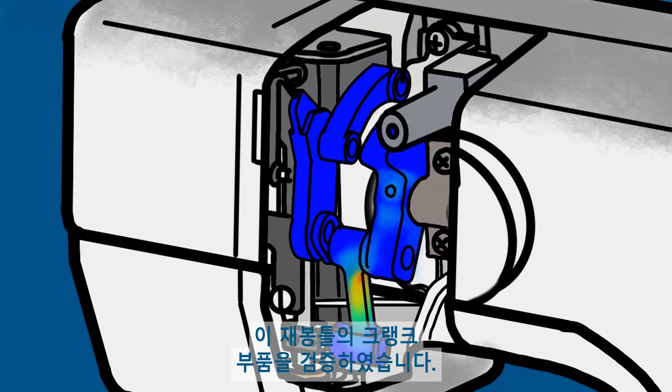Connecting SOLIDWORKS to advanced simulations just got a lot easier with 3D Experience Works. Adam has an existing simulation study to validate the crank components of this sewing machine. While a linear static analysis in SOLIDWORKS simulation provides good insight into the structural integrity, Adam needs more capabilities provided by the 3D Experience platform to solve for the dynamic response from the inevitable needle break.

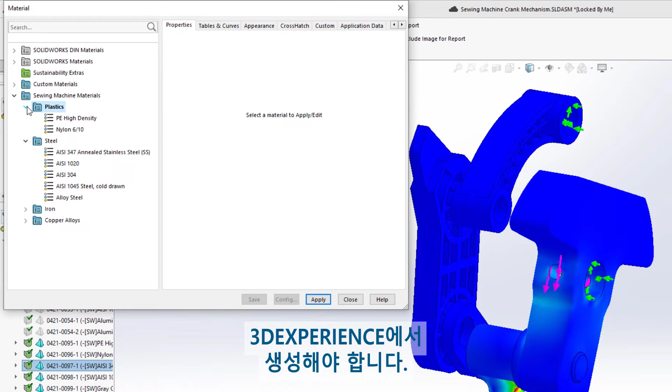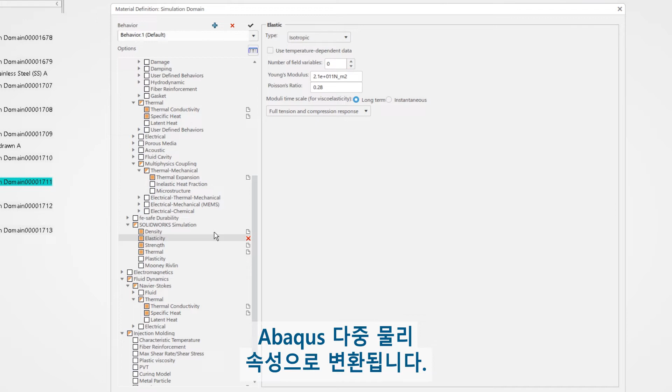Some of the sewing machine components are defined with custom materials, and they need to be created in 3D Experience. To automate this task, Adam imports his custom SOLIDWORKS material library. This eliminates the need for the time-consuming and error-prone task of creating materials manually. In these new material objects, the SOLIDWORKS simulation material properties are maintained and converted to Abaqus multiphysics properties. These are leveraged to solve for additional real-world phenomena. For the case of the needle break, Adam only needs to add damage properties.

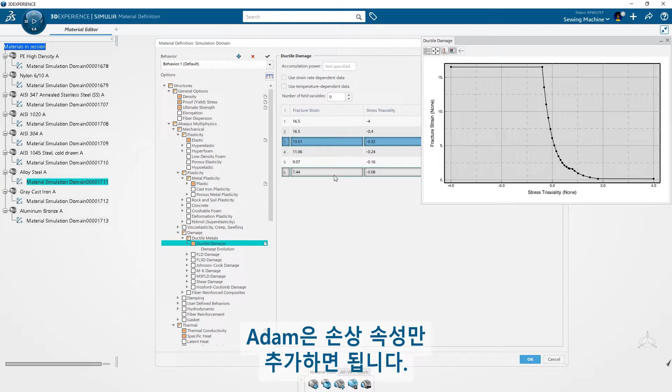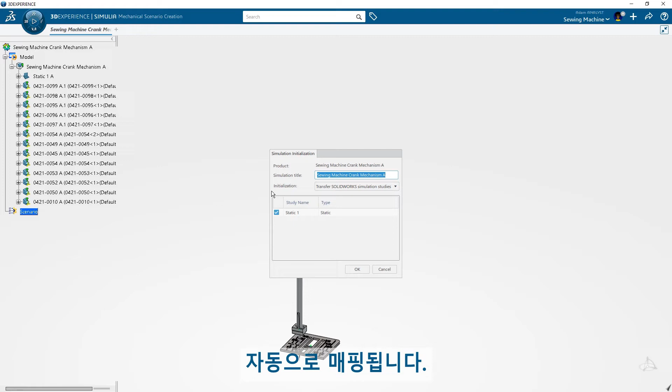Back in SOLIDWORKS, Adam has access to the centralized 3D Experience material library, so he can ensure he's defining the correct materials. Additionally, when he transfers the simulation study to the platform, the materials, along with the loads and boundary conditions, are automatically mapped to the newly created structural simulation. With this, Adam can easily extend his simulation workflow.

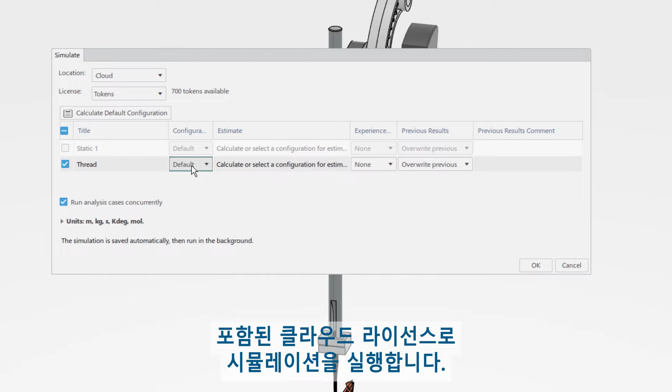Adam builds on top of the simulation by adding a new procedure with an explicit dynamic step, so he can solve for the needle break and the response in the sewing machine crank. To reduce the calculation time and eliminate the need for Adam's computer, he runs the simulation with the included cloud license. The simulation can be monitored from any device with a web browser, so Adam can easily track the convergence and see when the results are available.

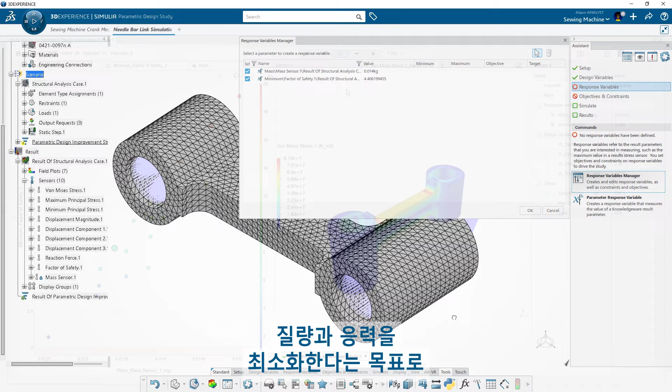While viewing the results, Adam identifies an opportunity to optimize the shape and mass of the needle bar link. He defines the SOLIDWORKS dimensions of interest as parameters and selects them in the new parametric design study in 3D Experience. With goals of minimizing mass and stress, the best design alternative is identified for him. With a couple clicks, he generates the alternative design, so he can perform additional analyses and update the SOLIDWORKS assembly with the optimal part model.

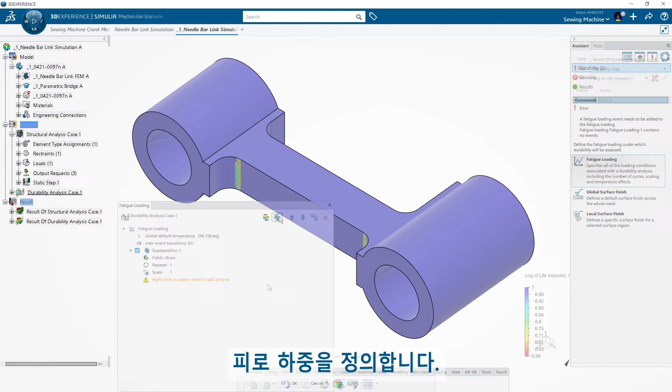To evaluate how long the link will last, Adam creates a durability analysis case and defines the fatigue loading. The results identify where and when the link will fail first. But how can he increase the life without changing the geometry? He modifies the surface finish in the weak areas only, which minimizes the amount of manufacturing necessary to create a long-lasting part. All of Adam's work is managed and automatically backed up on 3DEXPERIENCE.

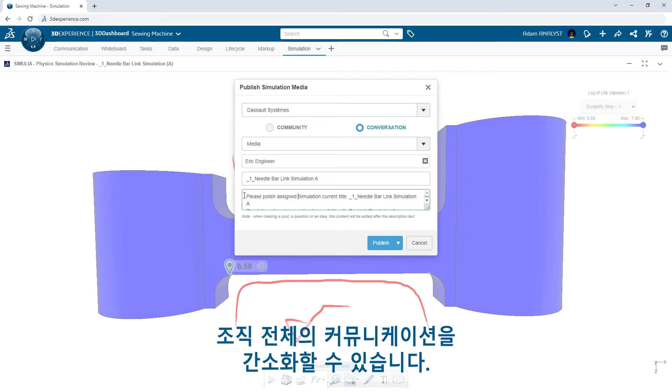Furthermore, he doesn't need to spend time creating reports of his simulations. Since all the data is on the platform, the details can be easily viewed in 3D in a web browser. Comments, notes, and changes can be shared with other stakeholders in the same cloud-based environment, streamlining communication throughout the organization. And this rapid product development and validation doesn't stop at structural analyses. Take on fluids, plastics, electromagnetics, and motion studies as well. How will you expand your horizons with advanced simulation and 3DEXPERIENCE Works?